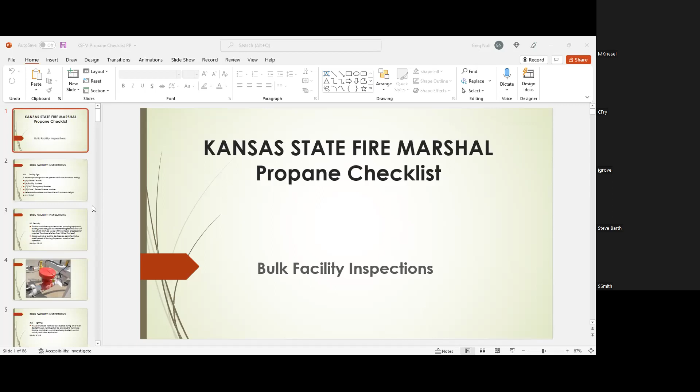The first slide is pretty self-explanatory. You've got to have your facility sign. It needs to be weatherproofed. It needs to have the owner's name, facility address, emergency phone number 24/7, and class 1 dealer's license number. Those have to be in 3-inch letters. Pretty well explains itself.

Yes. Ed, if I could just stop you there. If you look down in the bottom of your PowerPoint, there'll be something that looks kind of like a fountain. That'll put you in presentation mode. I think people can see the slides better that way. All right. Looks like a fountain. So let me know if this works better. Okay, well, you can go that way too. Yes, that'll do it. That look better? Perfect. Thank you. Yep, not a problem. I guess if you guys have questions as I'm going through, stop me. If not, I'll just keep rolling.

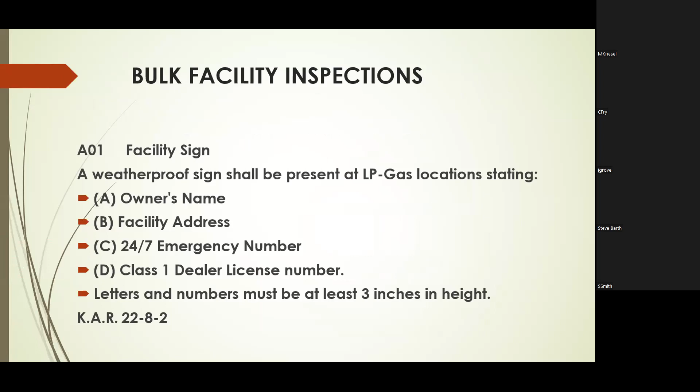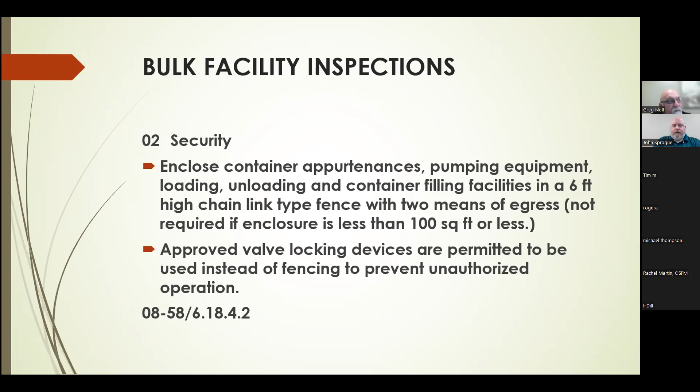The second one, your A02, is the security. You've got to have one of two things at each plant. You either have to have a fence around the area, and it has to be 6 foot high to keep the valves from being tampered with, and you need 2 means of egress, unless it's smaller than 100 square feet, then all you need is 1. Or you need an approved locking device that prevents people from opening the valves on their own. Went back one too far. I'll get this here in a second.

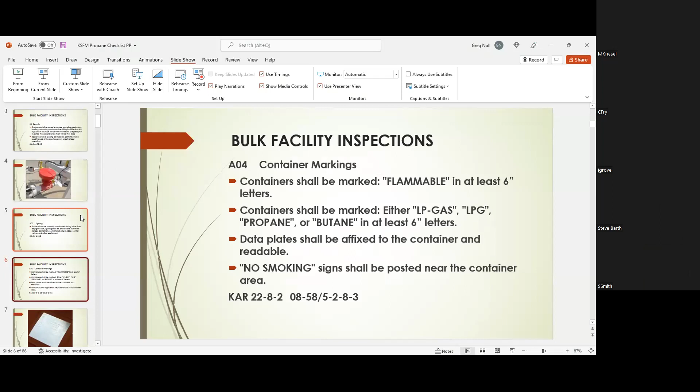This is an example of a purchased tampering device that you can buy to keep someone from opening valves on a storage tank. That's, of course, permissible, but the way I've always looked at it, if you can do something to prohibit the use of that valve without compromising any safety, to me, that's an approved locking device. I've seen a lot of people put a chain through the valve on the top and attach it to something solid and padlock it to where that valve won't turn. So the key idea here is to make sure you lock it off without hurting the safety of the valve.

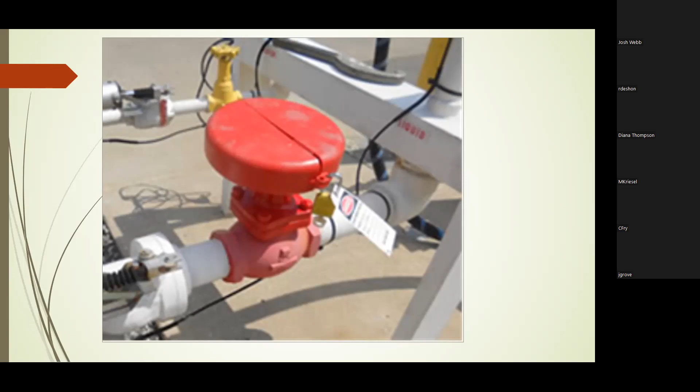Lighting: if you have people that are going to be working at night at this plant, whether they're filling bobtails or receiving loads from transport, they need to have adequate lighting. Lots of times you may get an answer from somebody, well, we don't work at night. Well, that doesn't control who brings propane to your plant, which can come any time of the day or night.

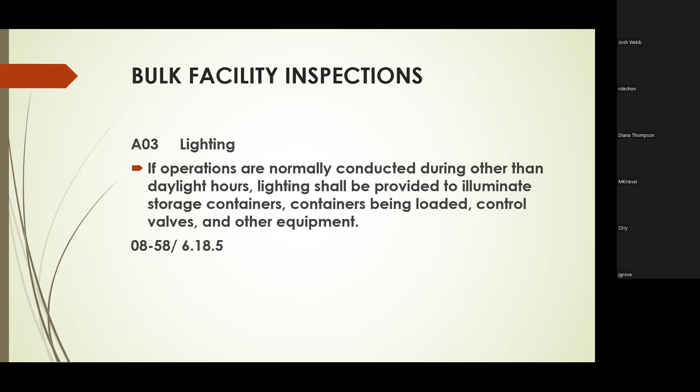Container markings: they shall be marked flammable in at least 6-inch letters. They need to be marked LP gas, LPG, propane, or butane in 6-inch letters. Each tank must have a data plate attached and it must be readable. And no smoking signs must be posted near the container area.

This is an example of a data plate. This is actually off a 500-gallon tank, but it would have the same information if you were looking at a storage. That's what you need to be looking for on a data plate, to get this information.

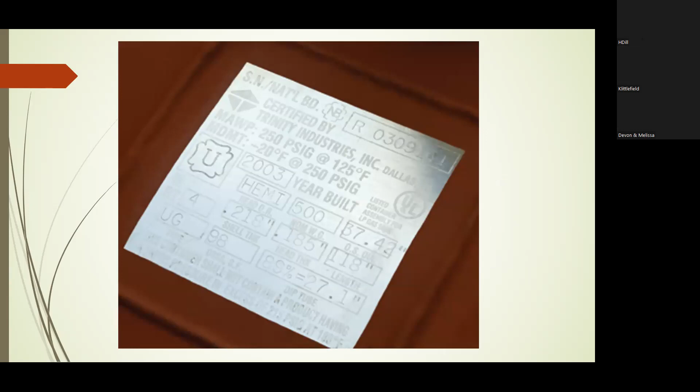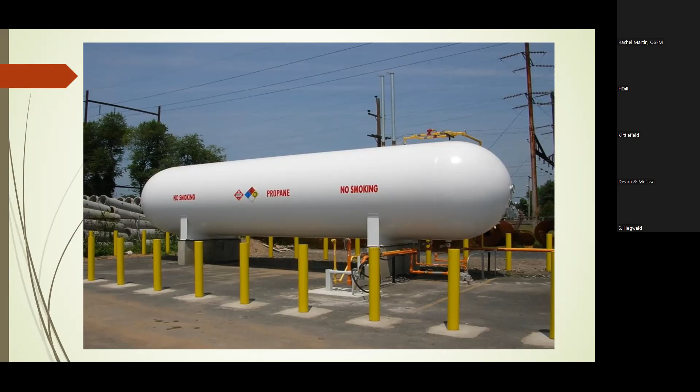It's also got an NFPA 704 decal. If you look real close, it says 140. That is an old signage that is not used anymore. It actually should say 240. And those should be on plants as well.

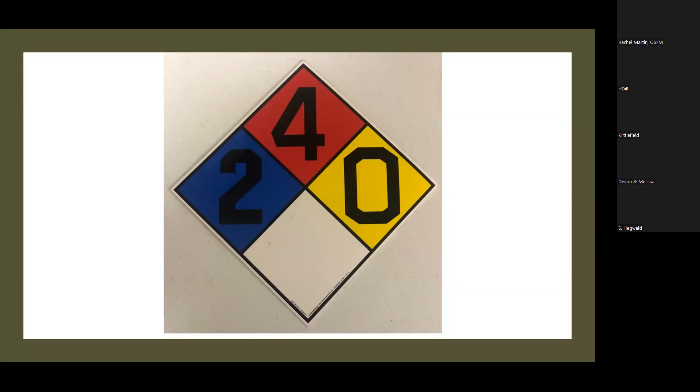Questions to this point? Anybody? All right, I'll keep moving. How's that there, Ed? You can also, if you do have a question, put it in the chat box. I'm monitoring that as well.

Okay, all right. This tells what an NFPA 704 decal is, who requires it, and who enforces this requirement. According to NFPA fire code, anything that is NFPA 30 should have one. It should be for the flammable and combustible liquids code. It's not on your form to check, but when people call and ask us, they tell us they need decals for a storage tank. We always include this and tell them to put this in as well. So I don't know how you guys want to work that as far as what you require, since it's not on your requirements for their inspection. But those should be on there.

Ed, we did get a question. It's maybe a good time for it, because you're just talking about locking devices. Yes. When are locking devices required for valves? Just when the facility is closed or not monitored? If they are inside a fence, the locking devices do not have to be on the valves. If they have a location with no fence and no one there, then they are required to be on the valves. So you either have to have a locked gate with no one in attendance, or you have to have a locked valve with no one in attendance.

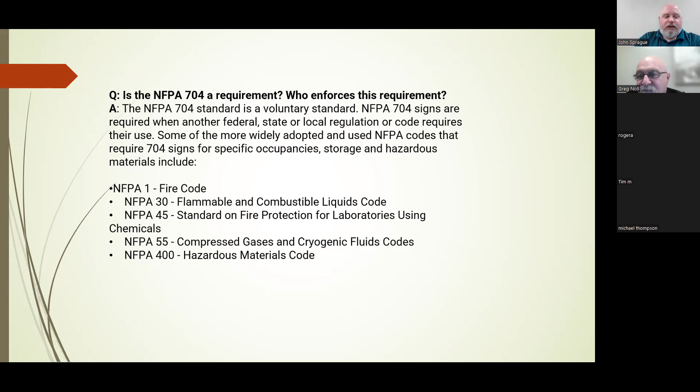Does that answer that question? I'm trying to see. Or if you just want to speak out, that's fine too. If you haven't noticed, this is the first time I've done a Zoom call like this, so I might be a little choppy. Perfectly fine. I think you continue on. We could ask later if we need to.

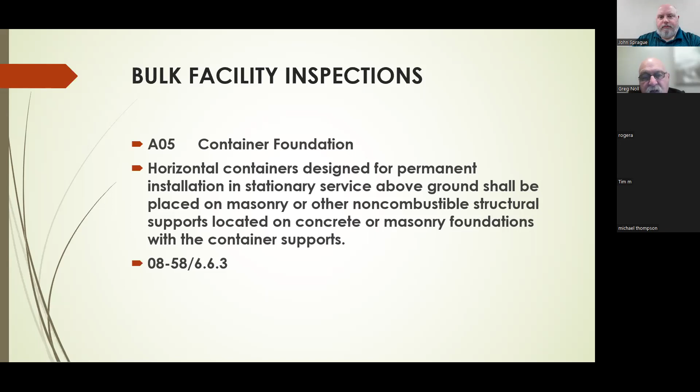You also have to have corrosion protection for these saddles and foundations. A good example is this picture right here. It's got the concrete pad underneath the steel saddle, and you can see that there has been a pad added between the steel and the tank to cushion it, and then they have properly weatherproofed it from there.

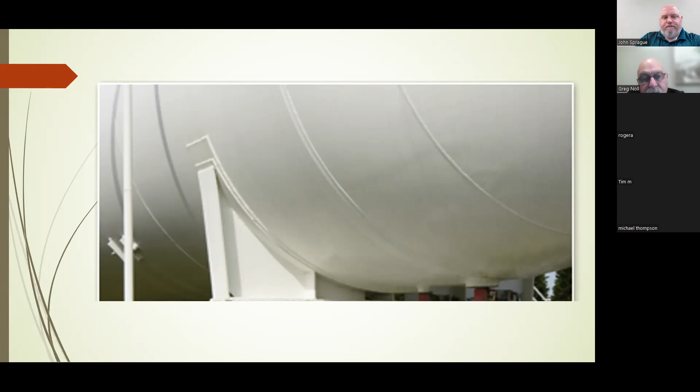I don't have any pictures for this, but it's pretty self-explanatory. If you've got diesel or gasoline at the same location and it's got a dike around it to keep spills from spreading, you have to have 10 feet from the centerline of that dike wall to any container.

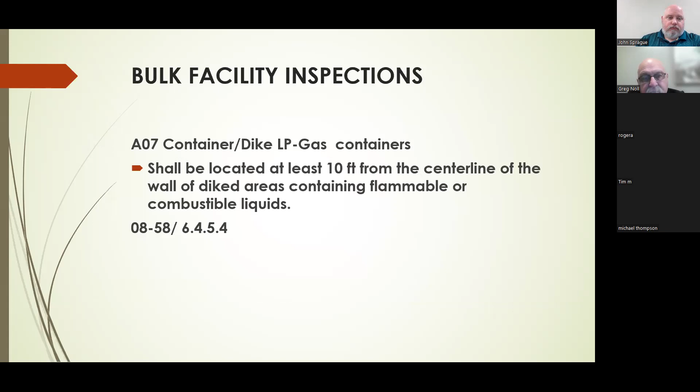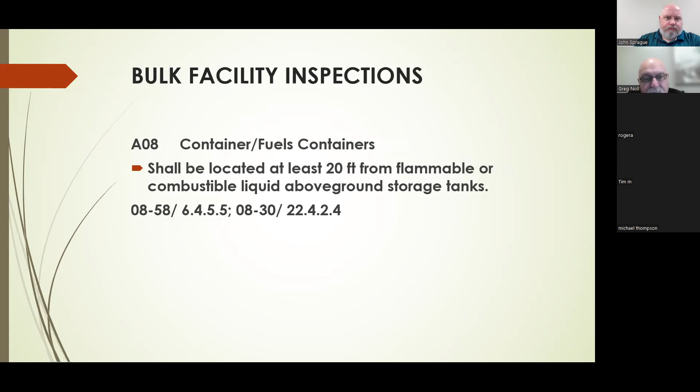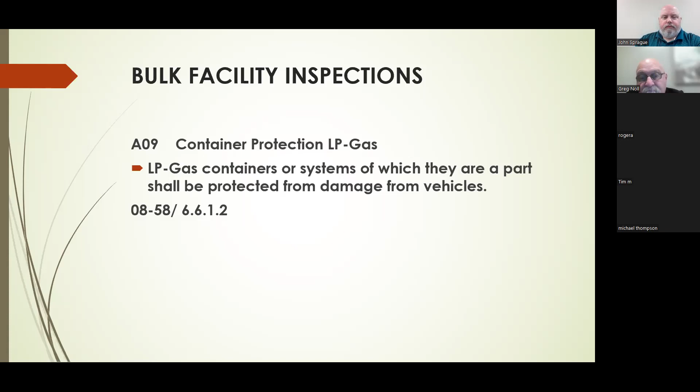LP gas containers must be protected from damage from vehicles. If you look there on 08-58/ 6.6.1.2, it's very vague of what needs to be done. The only statement it says is what's written on your checklist. It has to be protected from damage from vehicles. It's very vague. I probably want to talk to people about this on a more one-on-one basis to decide what needs to be done. I don't have a good answer. That takes care of that for now.

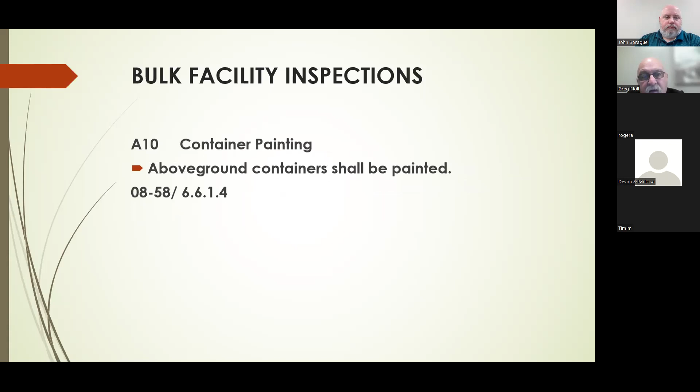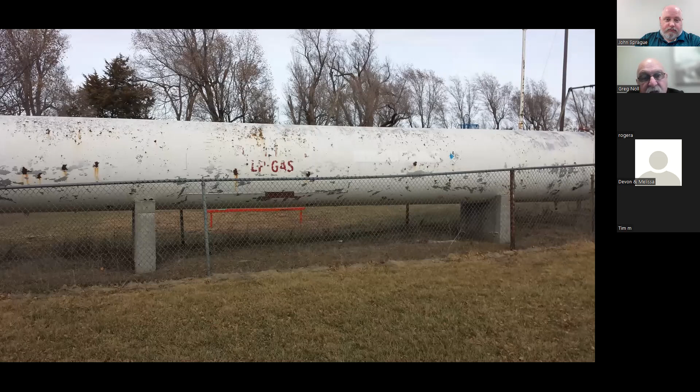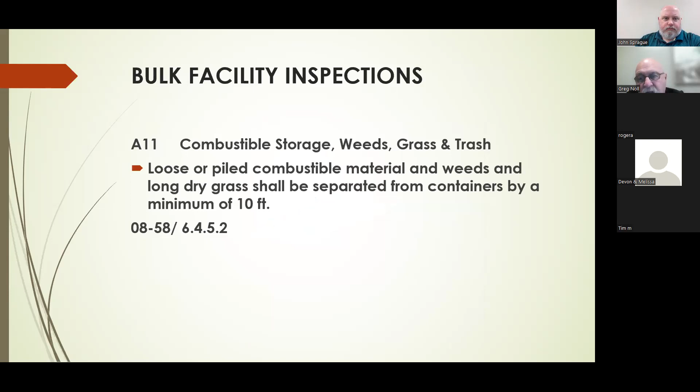Combustible storage needs to be kept away; weeds, grass, trash all have to be at least 10 feet from the tank. I have a good example here of somebody that probably needs to do some work. Not only does the tank need painting, but they've got skids and a wooden ladder stacked right up against the storage. That all needs to be removed.

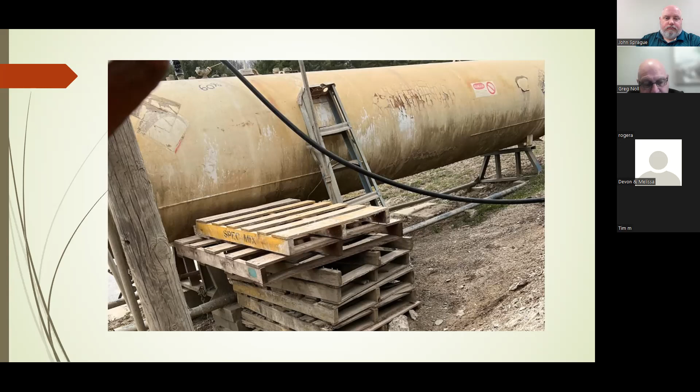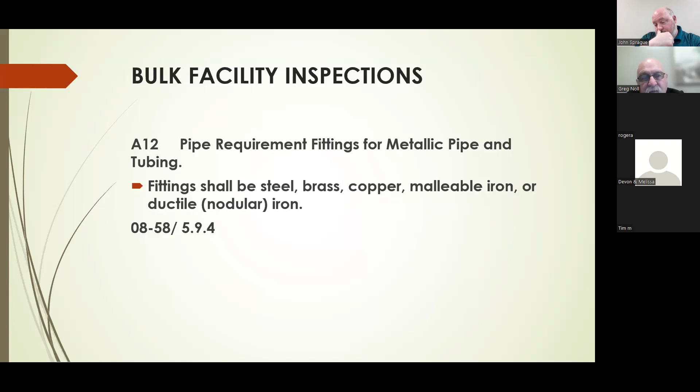Bulk facility inspections: the pipe requirements are metallic pipe and tubing. Fittings must be steel, brass, copper, malleable iron, or ductile iron. It shows that type of iron in this location here. All the correct piping. Pretty much self-explanatory there.

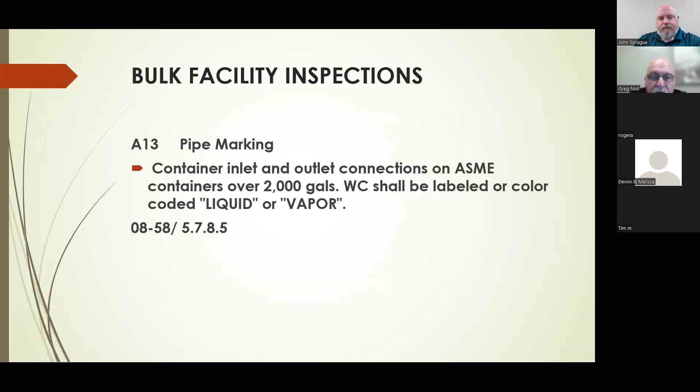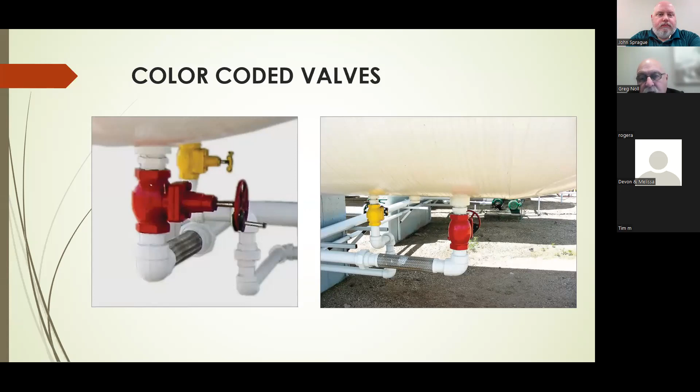Containers, outlets, and inlets need to be marked as well. They should be labeled or color-coded, liquid or vapor. The first picture we have here, we've got two valves, two systems. The liquid valves are color-coded red, and the vapor valves are color-coded yellow. The picture on the next page is kind of hard to read, but look up there towards the right. You can make out where it says liquid, and on the other it says vapor. This is an example where they were both color-coded and labeled liquid and vapor.

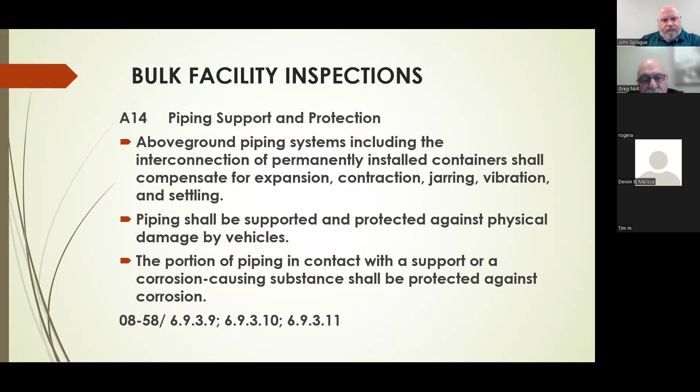These pipes that you run from the storage tanks to where you fill need to be protected. They need to be permanently installed to compensate for expansion, contraction, jarring, vibration, and settling. Piping should be supported and protected against physical damage. The portion of the pipe in contact with supports or corrosion-causing substances shall be protected.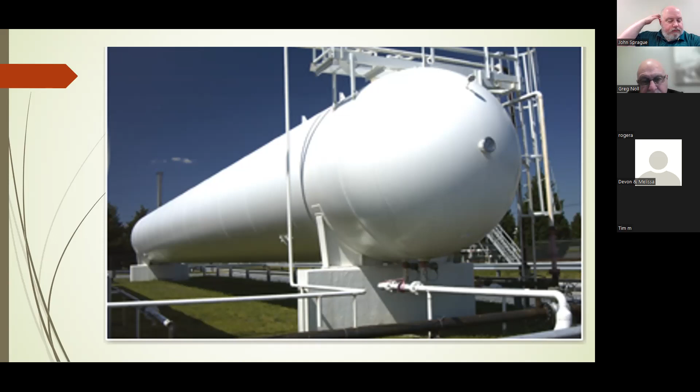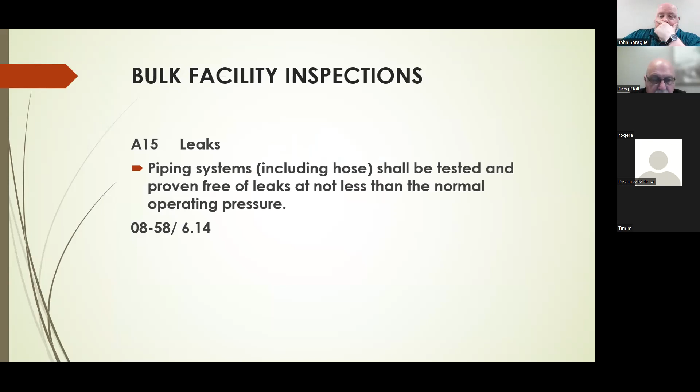Leaks. They need to be checked for leaks on a regular basis. And it says here at the normal operating pressure. Well, the normal operating pressure in the summertime could be as high as 170, 180 pounds pressure. In the wintertime, same system, everything's the same except for the temperature, you may have 20 or 30 pounds pressure to check those lines with. It's the normal operating pressure at the time that you're doing the test.

They all have to have an emergency shutoff. Do something here if it works.

All liquid transfer lines 1.5 inches or larger, and vapor lines that are 1.25 inches, must be equipped with emergency shutoff valves. Shutoff valves must incorporate a manual shutoff at a remote location. It can't be less than 25 feet or more than 100 feet from the valve, in the path of egress, and properly marked. The owner shall demonstrate proper operation of the ESV. They need to show you that that works.

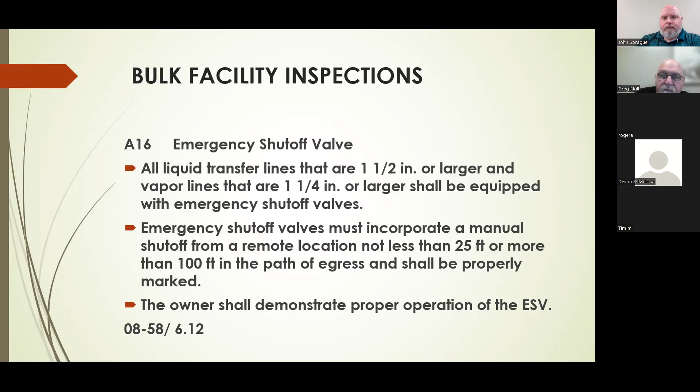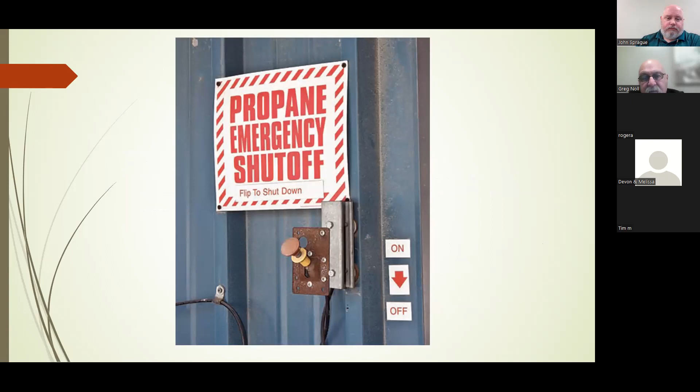Here's an example of a remote shutoff. You might see a sign like that. More often, you may see a sign like this. Either one's fine. It's marking where the emergency shutoff valve is, at least 25 feet away, no more than 100.

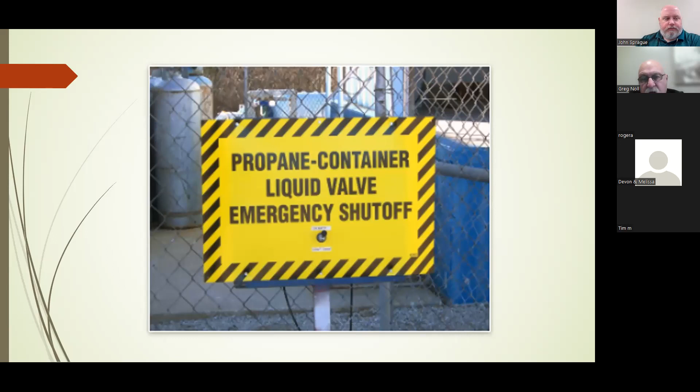Automatic shutdown on internal valves and liquid service shall be provided using a fire actuator. The thermal sensing element of the internal valve shall be within 5 feet of the internal valve.

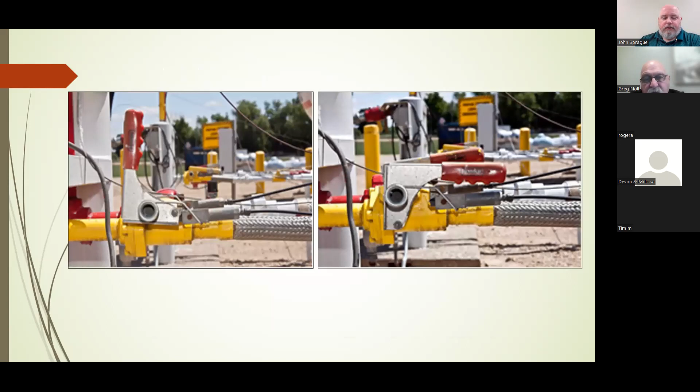Here's an example of what we call a Snappy Joe. The one on the left is in the open position. The one on the right is in closed position.

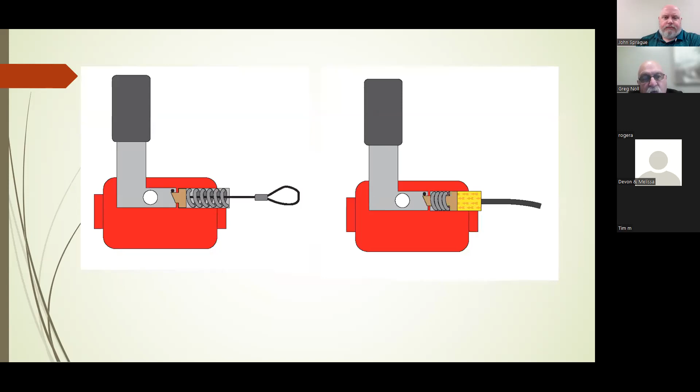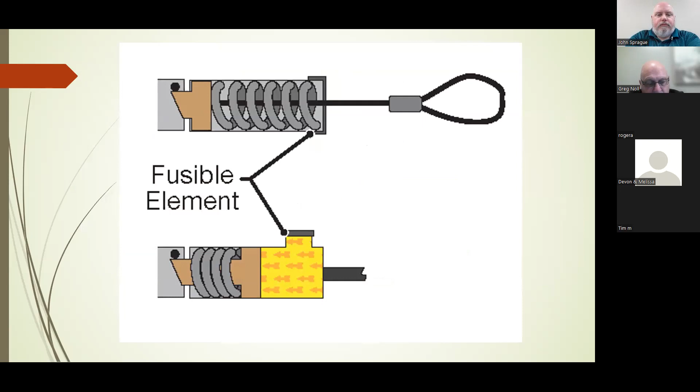This picture shows the internal workings of these valves. In each one, whether it's a cable type or a pneumatic type, there's a fusible element built into them, where if it gets too hot, like in a fire, they will melt.

This is one with a cable. You can see the cable's got the spring pulled out with the fusible link, and the bottom picture shows one that has melted and has automatically closed the system down.

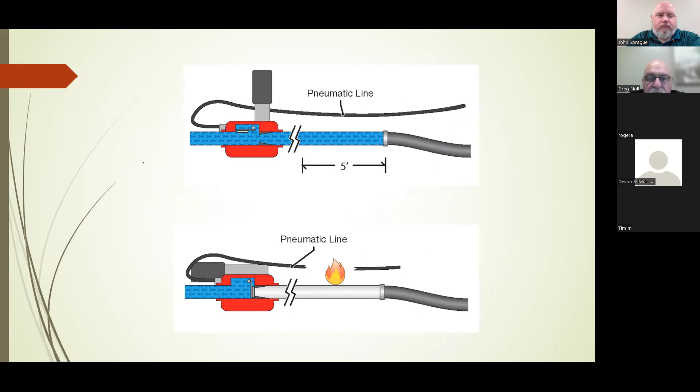Internal valve remote shut off. Internal valves installed in containers of 4,000 gallons or greater shall be equipped with remote closure and automatic shut off using thermal fire actuated devices, either installed but not equipped with a remote closure, and that needed to have been done by 2003, and all tanks by July 1st of 2011.

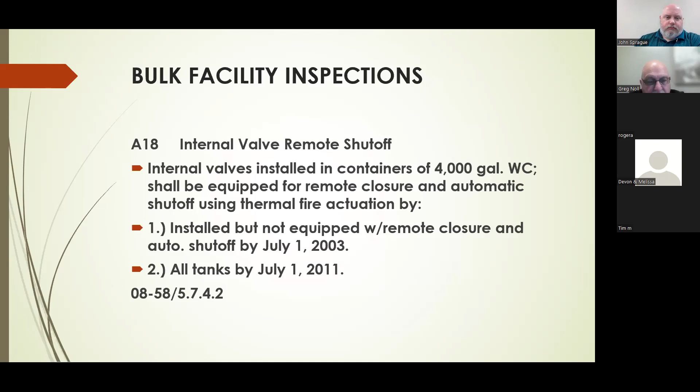This is an ESV, a picture of one with a pneumatic operator. And this is an internal valve with a pneumatic operator. They will close, they are the emergency close down, close off.

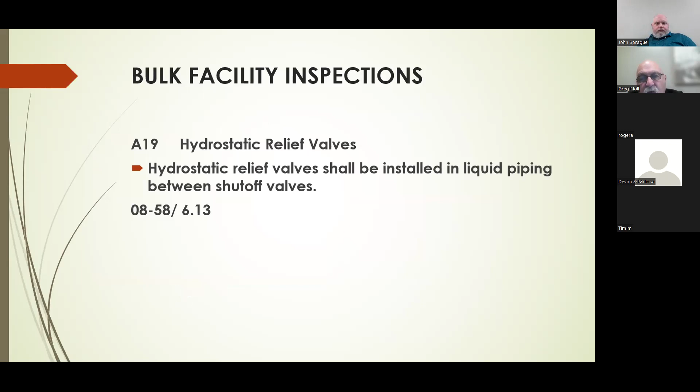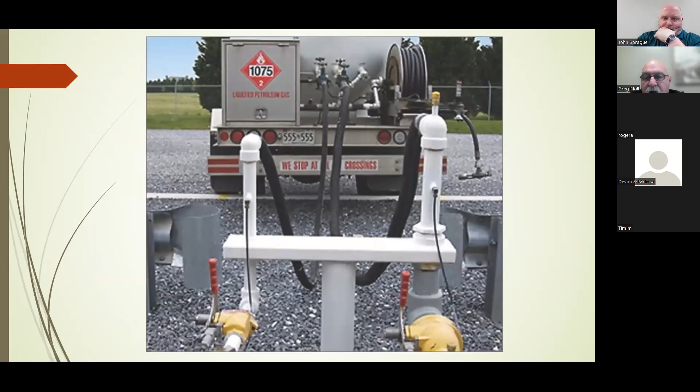Need to have hydrostatic relief valves. These valves go between two positive shutoffs. You can see there is a shutoff hooked up to the back of the truck with a shutoff valve, and then the Snappy Joe in the front of the picture. When those are shut off, look at the top of the upright pipe, and there is a hydrostatic relief valve there. That's for expansion. When that gas gets warm, especially in that black hose, it will build up too much pressure. That hydrostatic relief valve will relieve that pressure.

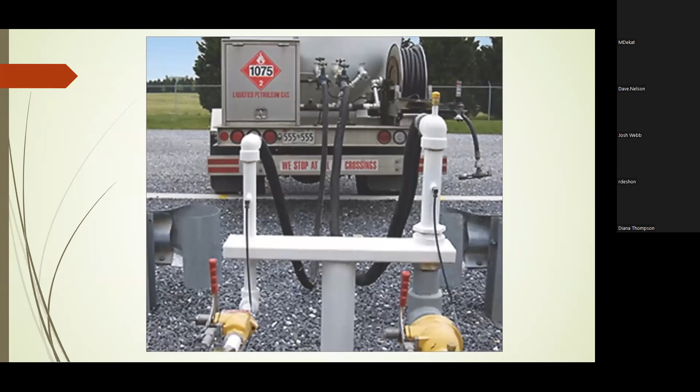Need to look for those between every positive shutoffs.

Relief valves. Every propane tank, whether it's a 20-pound cylinder or a 120,000 gallon bulk plant, needs to have at least one pressure relief valve.

Talk about the liquid level gauges. If you're filling volumetrically, it needs to be equipped with a fixed maximum liquid level gauge to indicate the maximum filling levels for the service in which the container is to be used. There is an exception: tanks built prior to December 31st, 1965 do not require these.

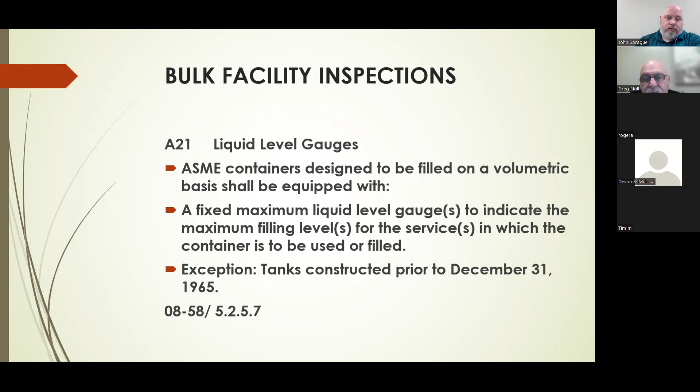This is another example of an 80% bleeder on the back of a bobtail. Most bobtails and storage tanks can be filled to 85%.

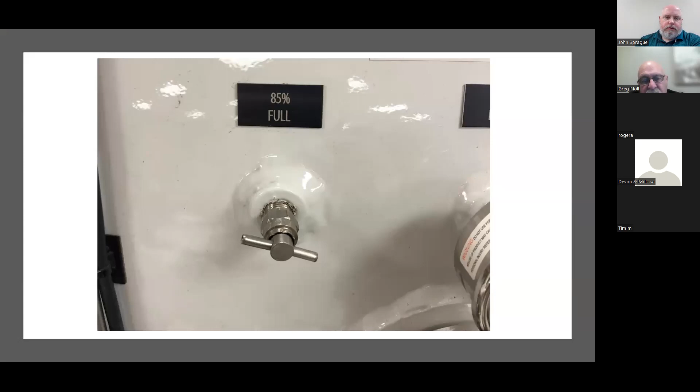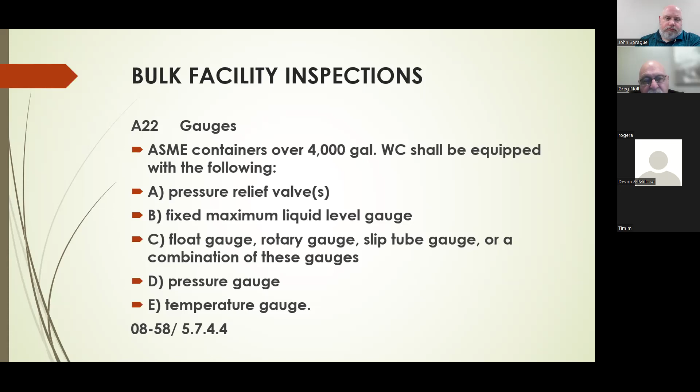Also, on 4,000 gallons or larger, you've got to have a pressure relief valve, a fixed maximum level gauge, some type of float or rotary gauge, a slip tube gauge, a pressure gauge, and a temperature gauge. These all need to be on a storage tank.

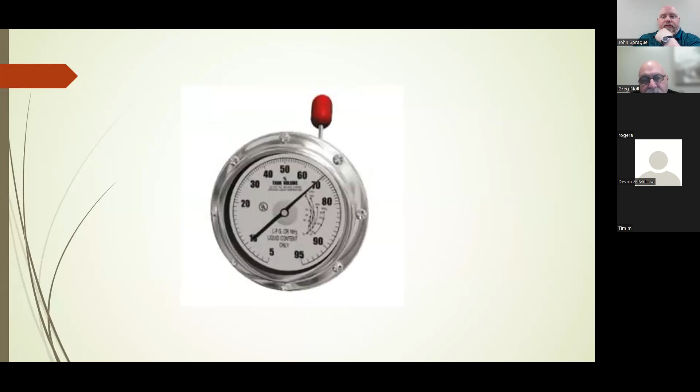This is a rotary gauge. It does the same thing as the float gauge, but it's done manually. There's an 80% bleeder right there in the middle. You move the bar from 100 at the top down to where liquid comes out, and where liquid comes out tells you how many percent is in that tank.

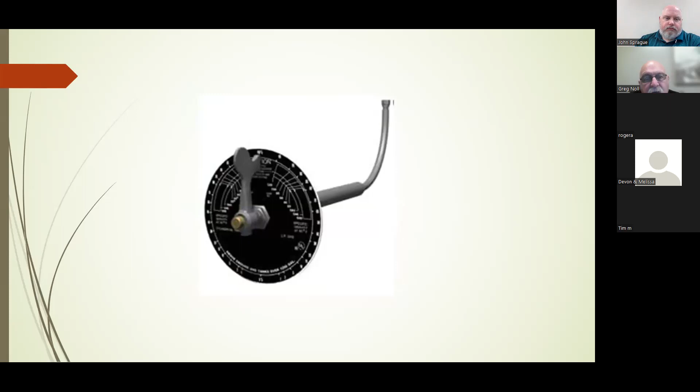Talk about rain caps. All the relief valves that you have need to have some type of a rain cap on them. The caps are always closed unless there is pressure being relieved, and they need to be set up to where they close back on their own. Also says at the bottom, the pressure relief valve discharge on each above ground container of more than 2,000 gallons shall be piped upward to a point of at least 7 feet with an opening unobstructed to the air.

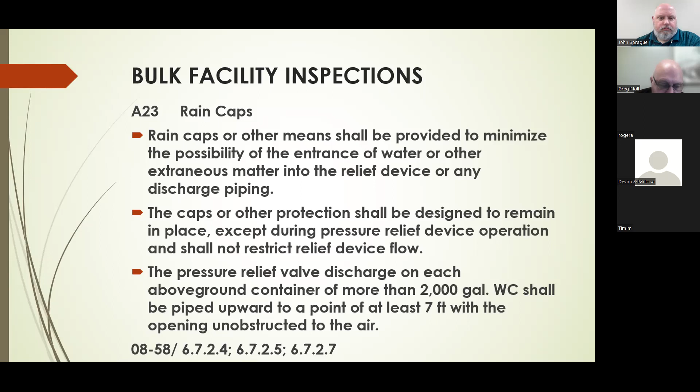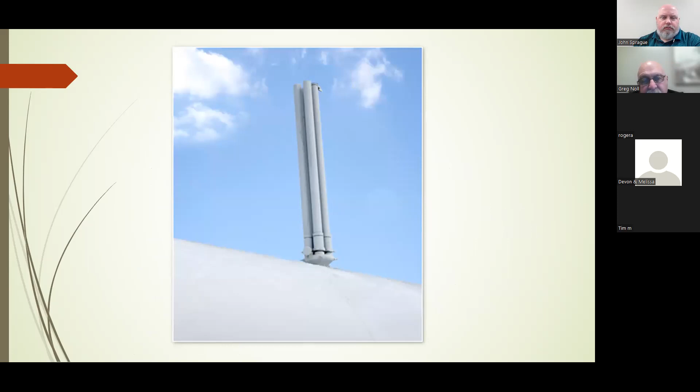This is a relief valve again with no stack. This is relief valves with a stack. And at this time, I want to let you know, you guys work on the NFPA 58 2008 gas code. And according to your checklist, you're supposed to check to make sure all these tanks have their relief stacks on them. However, in 2014 and up through 2020, the fact that relief stacks have to be on tanks is no

longer a requirement. And what happens normally is you guys will go through your list, you'll notice it, you'll give a deficiency for that. And usually the marketer will get ahold of us that, hey, we got written up for a relief stack not being on the tank. And we get with the higher ups at the fire marshal and say, this is no longer a requirement in newer versions of the gas code. And usually that violation is taken off at that time.

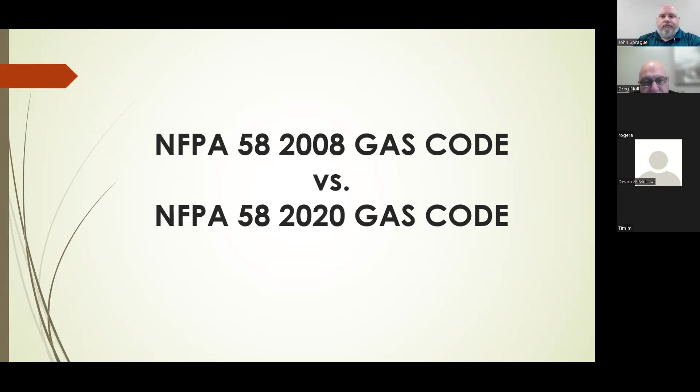You have to have flex connectors between the pumps and the containers, and between containers, to compensate for expansion, contraction, jarring, vibration. If wire braid is used for reinforcement, it shall be corrosion resistant. Flex connectors shall never be over 60 inches long and shall be installed in accordance with the manufacturer's instructions.

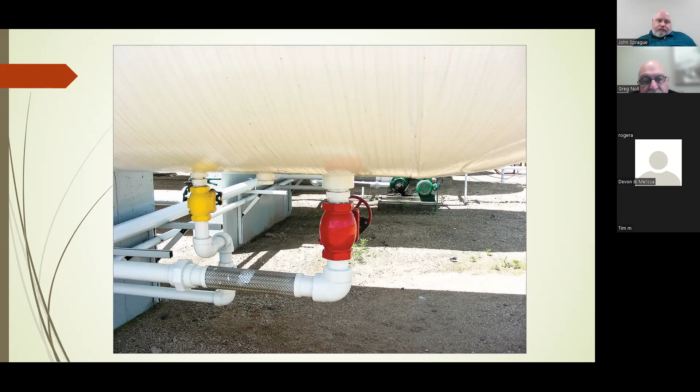Here's an example, a good example of a flex connector on a storage tank. And we've got another picture of one, same deal. It's a flex connector to let the vibrations of the tank not affect the piping.

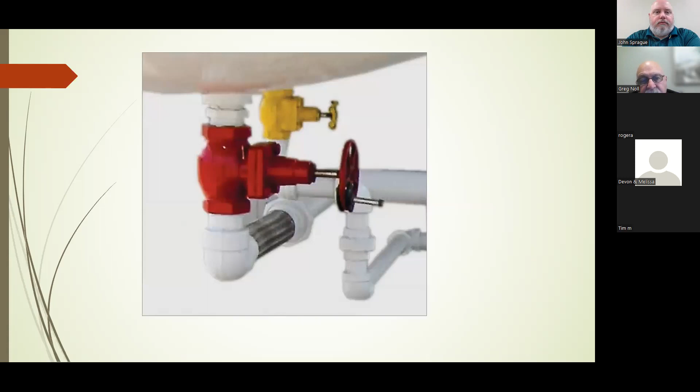Point of transfer, this one's another tough one to try to explain. If the point of transfer is not located at the container, or the container is not in a stationary position, the distance between the point of transfer and the exposures shall be in accordance with 6.5.3. Well, there is a table in the book under 6.5.3 that lists several different distances that you got to check on. So you have to look at that chart and do it on a case-by-case process.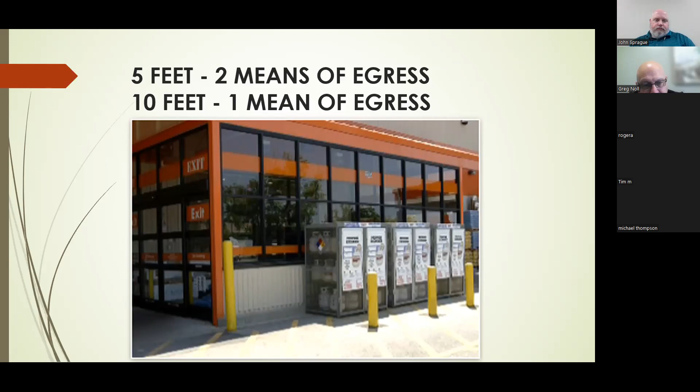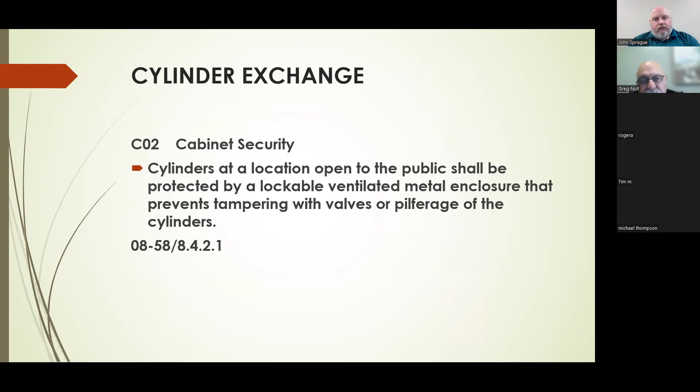We got a picture here. I've got several racks. If you got one door, you have to have 10 feet. If you have two doors, you have to have at least 5 feet. Once again, you have to have 20 feet from a fuel dispenser. You have to have some way of securing it. Cylinders at a location open to the public shall be protected by a lockable, ventilated metal enclosure that prevents tampering with the valves. Pretty simple. If you're going to have cylinders out, you're going to have a cage to put them in, to stop tampering and people from stealing them.

Cabinet protection, and we're going to have another discrepancy here. Protection against vehicle impact shall be provided in accordance with good engineering practices where vehicle traffic is expected at the location. This protection of each cabinet shall consist of guard posts, tire bumpers or curbs made of concrete. Tire bumpers or curbs shall be at least 4 feet long and at least 5 inches in height and shall be permanently affixed.

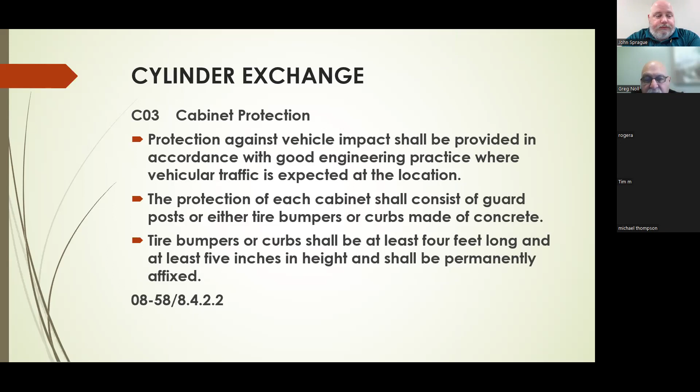This falls into the same thing that we talked about on the risers for stacks for relief valves. In 2014, it was determined through extensive testing that the cages themselves were adequate protection for the cylinders and the cylinder valves. So same thing, you guys on your inspection sheet are going to probably ding somebody because they don't have protection. The marketer will get a hold of us. We'll talk to the fire marshal and say, hey, they follow 2014 and newer 58s, and that violation is usually removed.

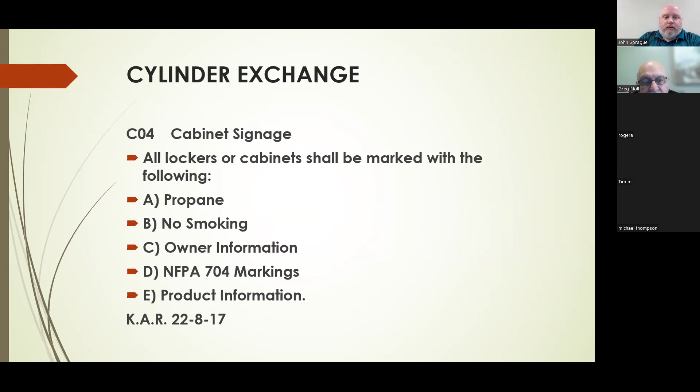All cabinets must be marked with propane, no smoking, owner information, NFPA 704 markings, and product information. There is a rack where I believe everything required from that previous page is located in some spot.

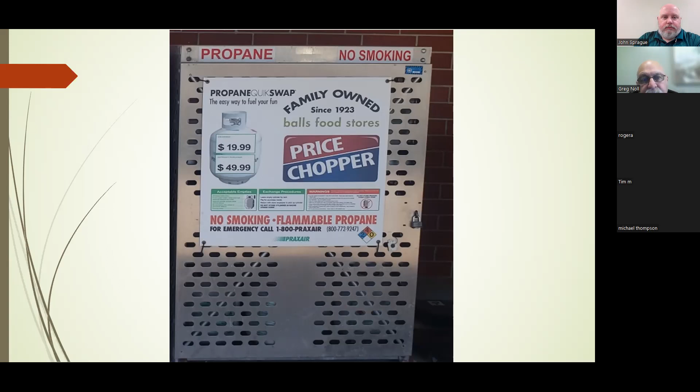Signage and warning labels shall be applied to all cylinders of 100 pounds or less. Warning labels shall include information on the potential hazards of LP gas. Although this picture is a little blurry, this would be an example of what you might see on a cylinder required to have it.

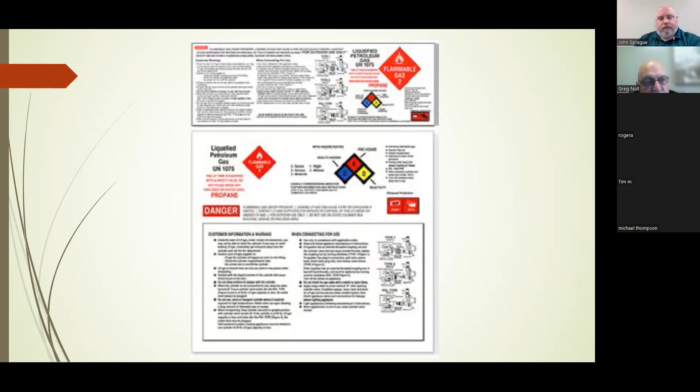Cylinder condition: cylinders should show no excess denting. On your inspection sheet it says 'building,' but I believe that was meant to say bulging, gouging, corrosion, or any of these should be removed from service. All cylinders from 4 to 40 pounds shall be equipped with an overfilling prevention device.

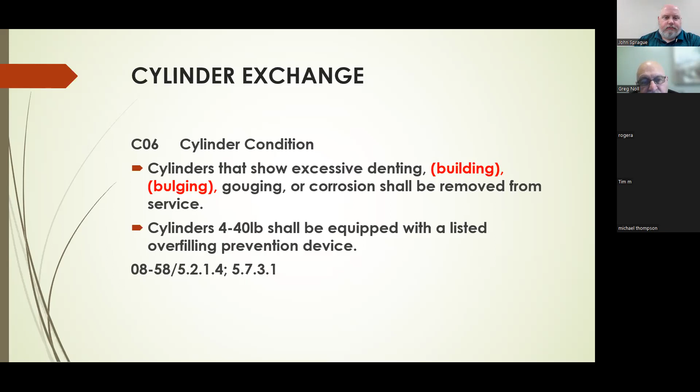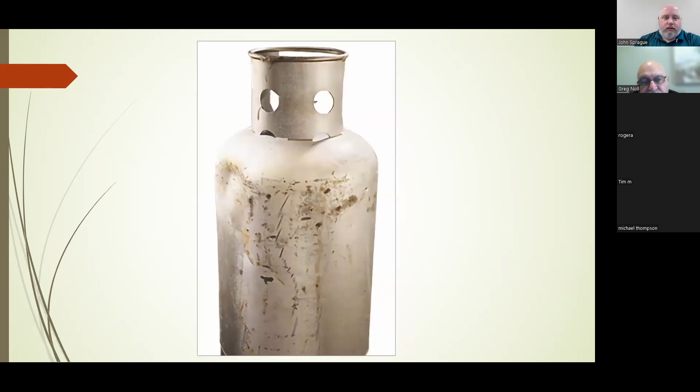Example of a bulging tank - look to the left at the top of that tank. There's a pretty good sized dent. This one has a pretty good sized gouge. And here's a pretty rusty cylinder.

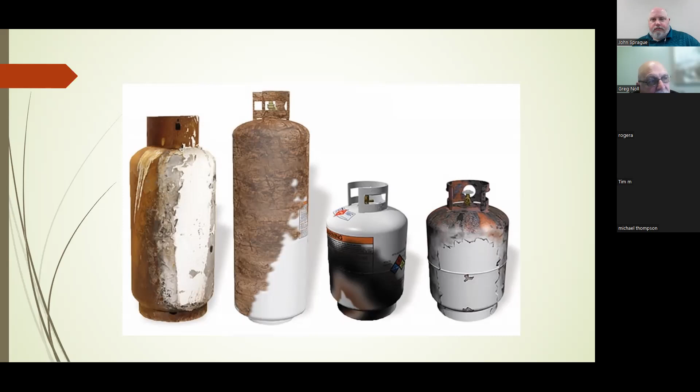One thing that wasn't on the checklist but probably should be is a tank that might look something like this - these have been exposed to fire. They may be reusable, but these tanks would have to be sent off and re-inspected by a manufacturer to be put back into service. Anytime it's an aluminum cylinder that has shown evidence of fire, it is automatically rejected and can never be reused.

Here's an example of an OPD valve top. They usually have a triangle handle on them like this.

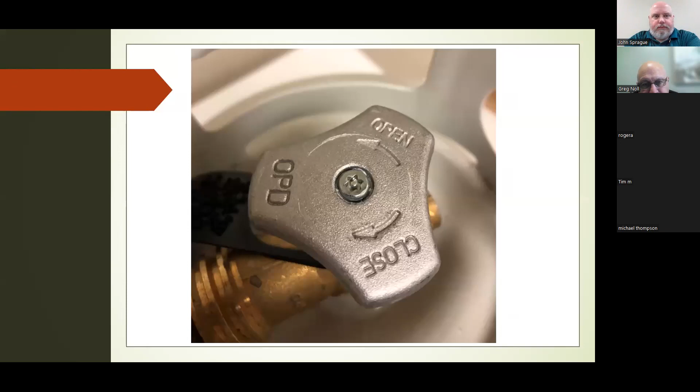And lastly, cylinder fire extinguishers: where the aggregate quantity of propane stored is greater than 720 pounds, an 18 BC portable fire extinguisher must be located no more than 50 feet from the storage location. In the 2020 NFPA 58 code, and I believe starting in 2017, they started requiring it to be an ABC portable cylinder extinguisher instead of a BC.

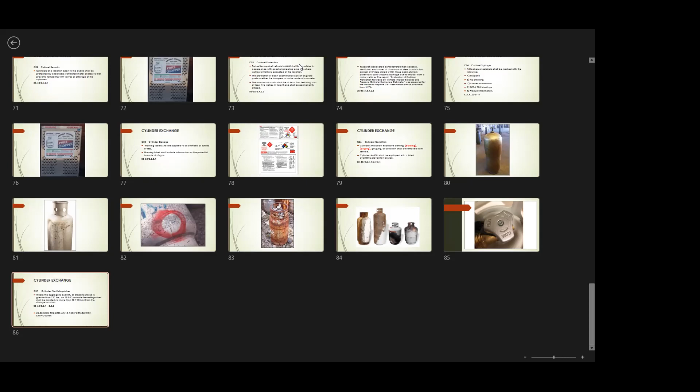Okay, hold on, we do have a question. Any bonding or grounding requirements? Nothing for the propane itself, no. The only bonding I ever run across is when people are using methanol to put into tanks for moisture, and that would have nothing to do with what you guys would be checking for.

Okay, and we got another question. Can you have a 40-pound tank close to a gas can, or does it need to be 20 feet away? It should not be stored in the same area. It should be 20 feet away.

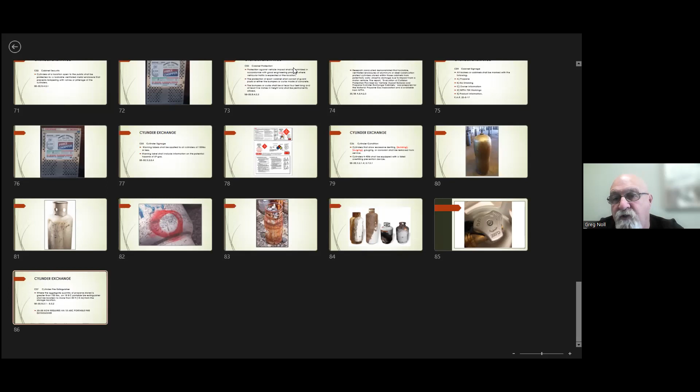Well, sounds quiet. I believe, yeah, it does sound quiet. So we'll follow up. If there's any questions, again, I just want to thank you both. If somebody comes up with something they want to ask, you got my email, just shoot it to me and I'll get you an answer. Sounds great. Yes, I can do that.